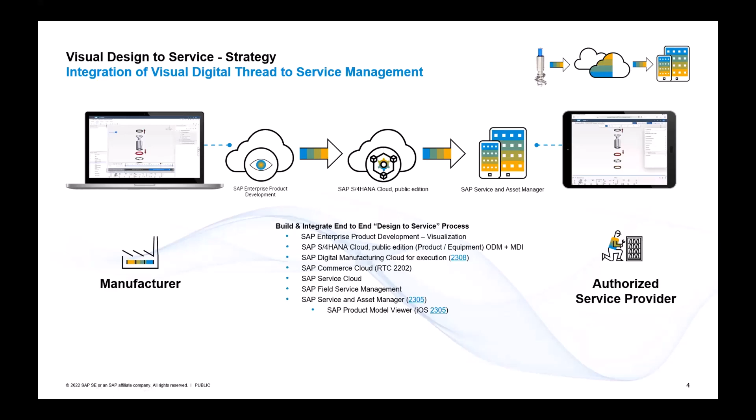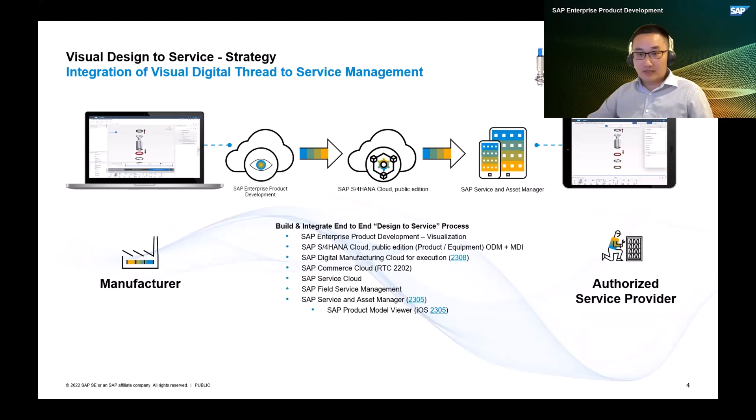And in summary, what we are proposing is a full cloud end-to-end solution. S/4HANA would be the digital core, and obviously, our service solutions in the cloud, as well as the mobile delivery for the execution of service. The input of this process comes from both 2D and 3D of the mechanical CAD software. So likes of Siemens NX, Solid Edge, CATIA, SolidWorks, Creo, and so on.

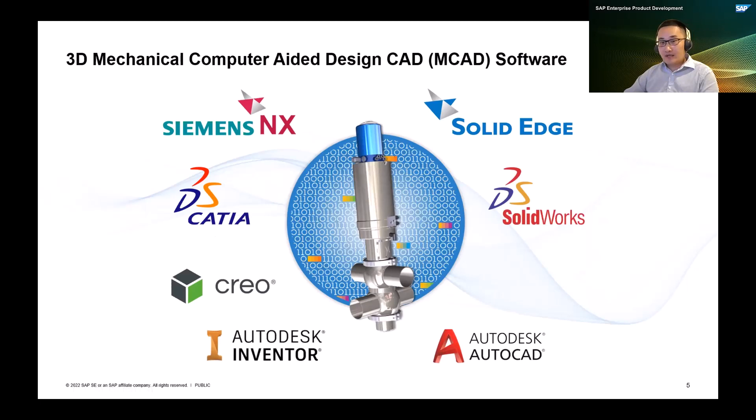And essentially the first question we're being asked was, well, how do we hand over this information? Well, within EPD visualization, we have the ability to basically restructure from engineering BOM to any structure. We do that through a tool called association. And you will see this a little bit further down in the end-to-end process.

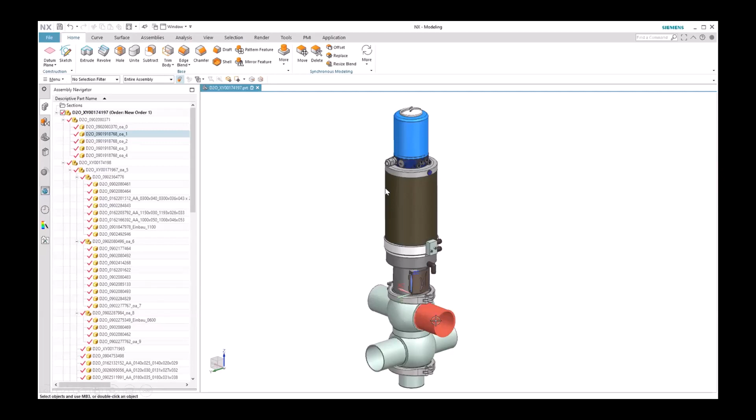All right, so we start with the native CAD files. It could be a visualization, a derivative of that, JT, for example, or 3D XML from CATIA. Doesn't really matter because EPD visualization supports most of the native and the interchange file formats. So we can bring the CAD files into EPD visualization and visualize it.

Within EPD visualization, we have a number of capabilities. The last three capabilities, which will be potentially leveraged by the downstream service solutions, are visual spares and service, visual work instructions, and the product model viewer. I will spend some time to walk you through each of these three capabilities over the next few slides.

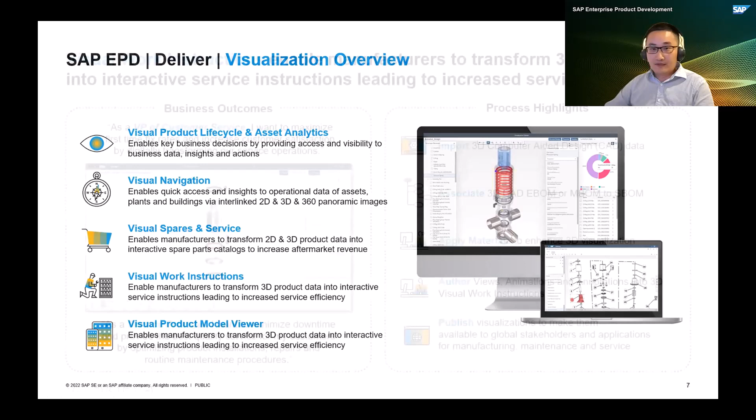Okay, so one of the capabilities is the visual work instructions. Visual work instructions shows how to assemble a product on the shop floor or how to maintain some equipment installed in the field. It enables the manufacturer or service provider to transform the 3D product data into the interactive service instruction, which ultimately increases the service or production efficiency.

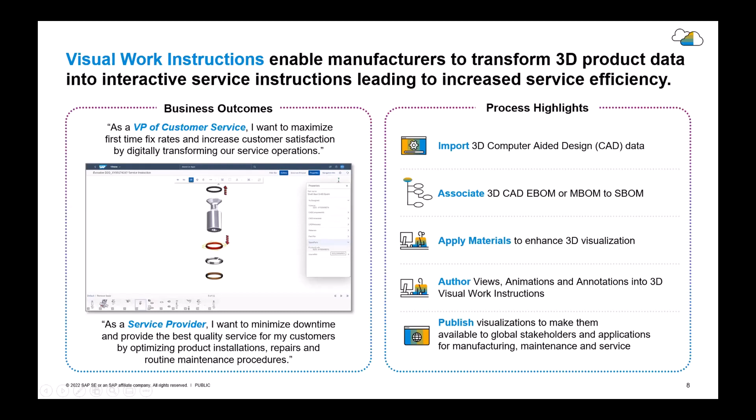Imagine if the service technicians are sent to the field to fix something. They can leverage this visual work instruction to see exactly what needs to be done, which will increase the productivity, accuracy, and ultimately the customer will be happy. And visual work instruction can also be used for manufacturing, asset management, or even logistics to show how the product is disassembled and reassembled on site. Okay, I will talk about the process in the next slide.

Okay, so basically this is the end-to-end process of creating a visual work instruction. User starts with importing a 3D CAD file, then using association to create a new visualization structure and connecting the visual object with the backend business data.

Then use the visual authoring to apply different material or create animation or annotation into the visual work instructions. Then user can also create a viewer template within EPD visualization for a specific persona or use case. The last step is to publish the visualization.

And I just want to also highlight that we actually have a planned innovation in our roadmap that we will support change management for authored visual content, meaning that the user will have the ability to update the visual work instruction if there's any change to the original CAD design.

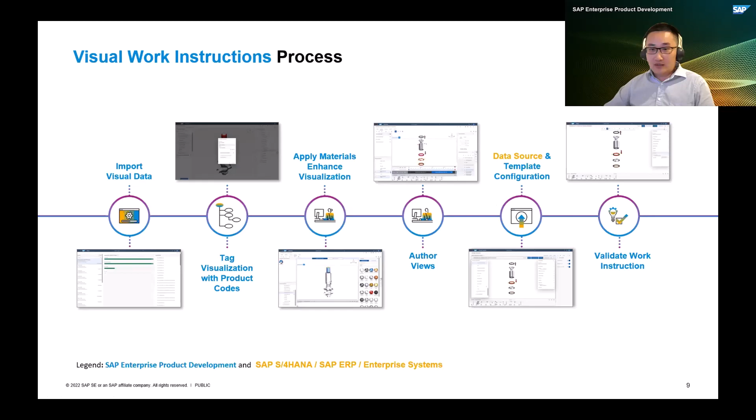And this is just showing you the visual work instructions that we've created for EvoVolve. As you see here, we have tagged each one of those nodes with appropriate global unique identifier. It could be a material ID, or could be a functional location or equipment ID, doesn't matter. Basically, we can assign any type of usage ID to the visualization, which makes the visualization a business context where user can retrieve information for any node or object from any system.

In this case, we have tagged this visualization with product code for Commerce Cloud, but also as designed, which has the material ID here. As I mentioned earlier, our view template is highly configurable, so user can now create a custom 3D user interface by persona. So basically, this view and look can be changed accordingly by the customers.

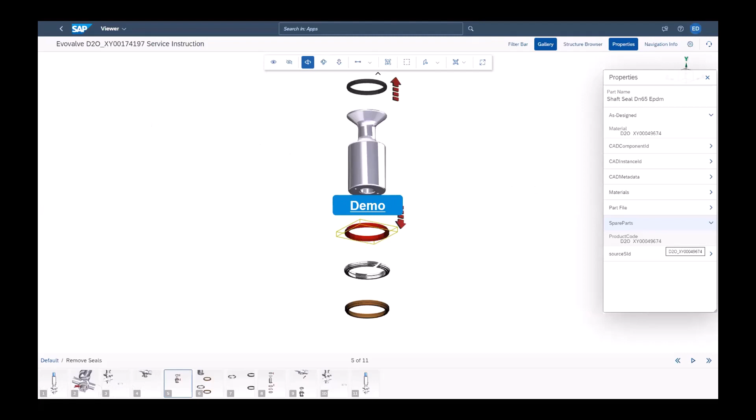Now, let me quickly show you how this visual work instruction we created in our demo system. Okay, as the visualization is loaded in the viewport, there's a toolbar on the top that allows user to perform some basic actions. If user wants to search for a particular node of this model, for instance, the shaft seal in my slide is worn out. How does it look like? Where is it located? You can use this filter bar to search either by name or metadata or usage ID.

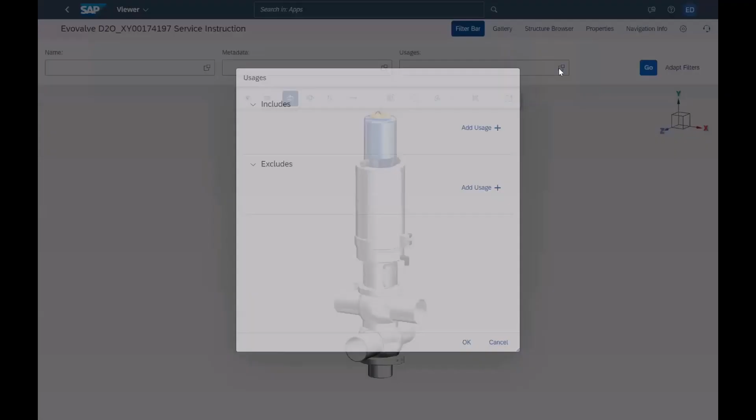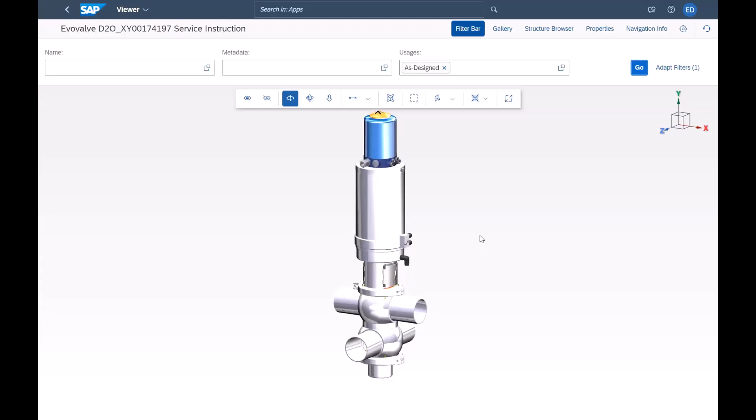Okay. In this case, I will use the usage ID because I know that the visualization has been tagged with as designed, as I showed you. And I will use partial product code, or material ID I should say, for that shaft seal in this case. So you can sort of see where that shaft seal is located, but to make it more visible, you can use right-click and click isolate. Basically, this will isolate all the other components, just showing you the selected parts that you want.

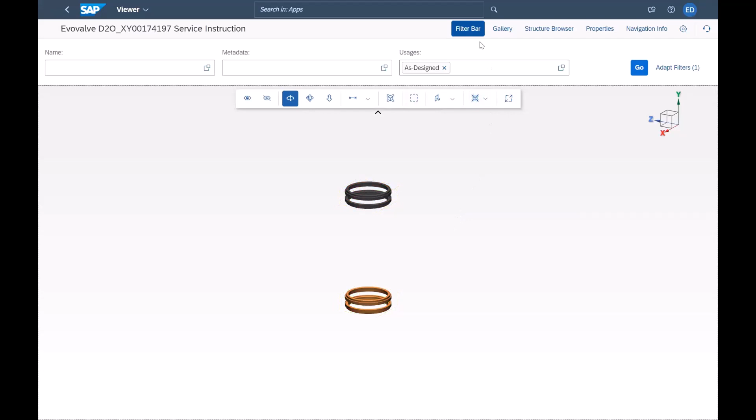And to play the animation, simply click Gallery tab. You can either play the selected view of the animation, or you can play the entire 3D visual service instruction. In this case, I will do that. And in addition, you can merge the visualization into this model. The arrow you just saw is an example.

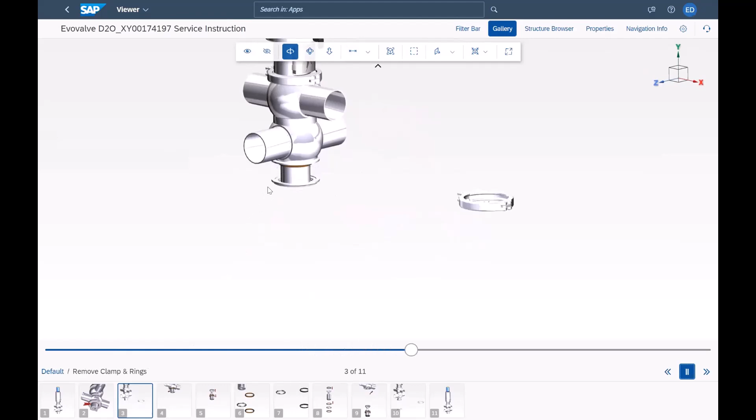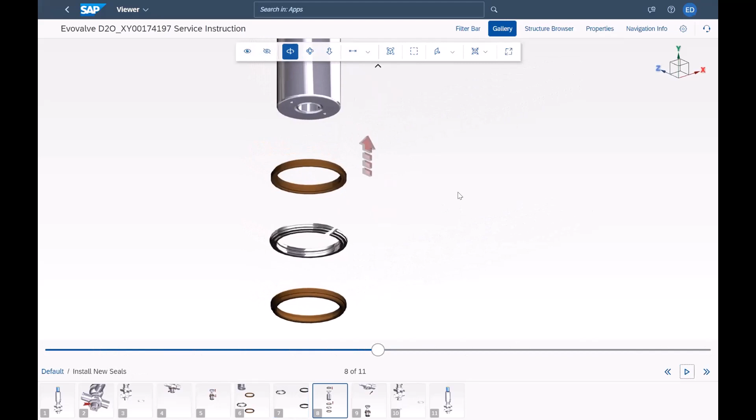So for instance, whoever created this visual work instruction can also add some health and safety symbols to enrich the animation content, all right? So this visual work instruction basically shows how the Evovalve is disassembled, and once the technician replaced the shaft seal, how it's reassembled back. The user can also add some annotation onto the work instruction to help the service technician to understand more information on how to assemble this part.

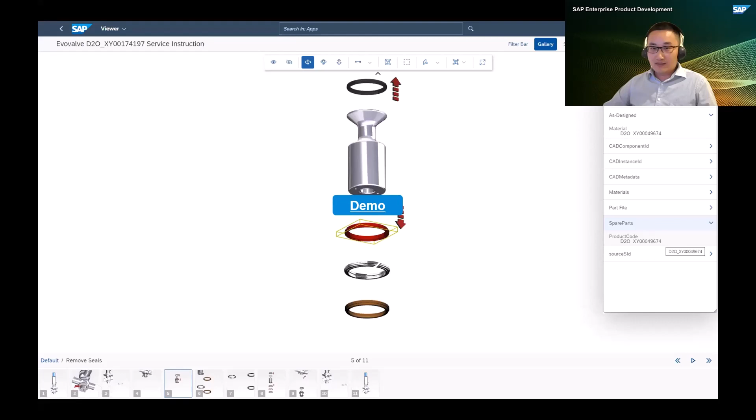And now let me switch back to my slide. Here you actually notice that I have made a selection on this model. So I selected the shaft seal because in this case, the Evovalve has been leaking because the seal is worn out, as I said. Now, what if we wanted to replace the seal with a new one? How do we quickly identify and order this component from the spare parts catalog? And now this brings us to the next use case here, visual spares and service.

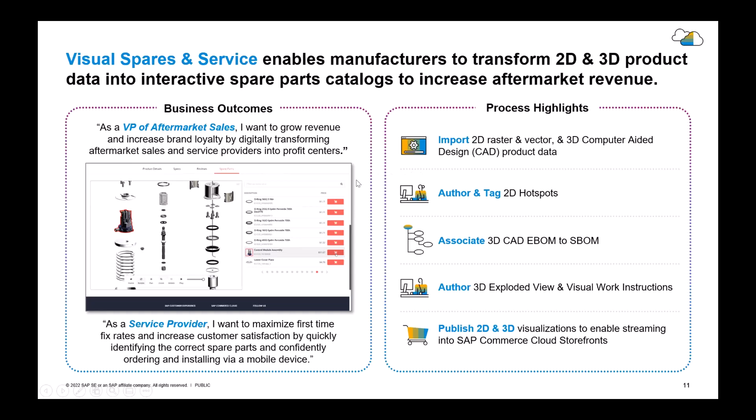Visual spares and service is an end-to-end process from design all the way to commerce. It enables the OEM manufacturer using visualization and integrate it into SAP Commerce Cloud to go after their B2B customers or authorized service provider. So how does the actual process look like? Well, the first few steps are very similar to the process of creating visual work instructions.

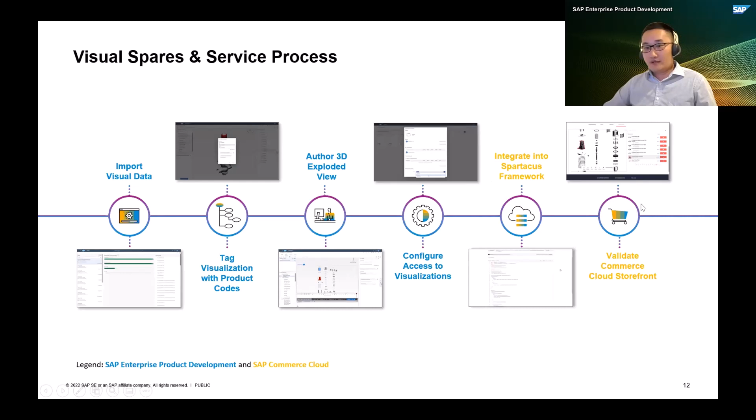The difference here is once the user finishes the authoring, then they make the visualization accessible to the Commerce Cloud storefront by publishing the visualization to a folder that is enabled for Commerce Cloud storefront access. And moving to the Commerce Cloud side, customer will use Spartacus to develop their web store for the spare parts purchasing and configure the Spartacus storefront for EPD visualization.

This is showing an example of streaming visualization into the viewport so the user can make selection for the spare part they need. I will show you how this visual spare part selection works in our SAP Commerce Cloud.

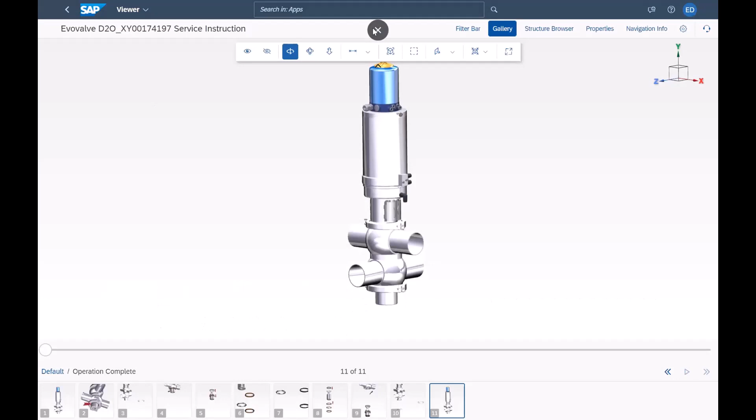So here I'm in EPD visualization. You see this 3D Evovalve. It has been tagged with a usage ID, in this case the Commerce Cloud usage ID that I've shown in the previous slide.

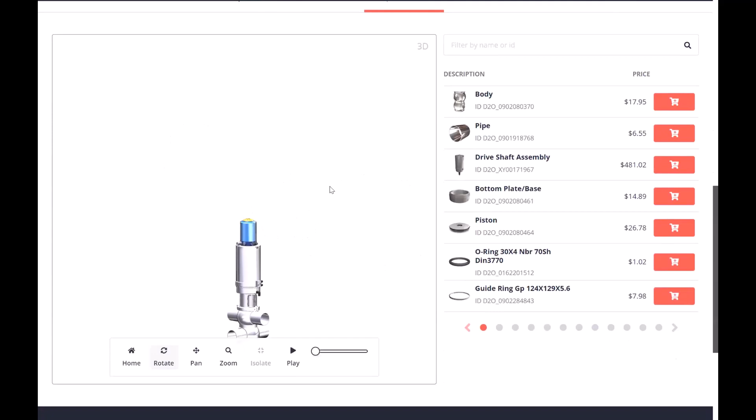If I scroll down in the spare parts tab, I'm now streaming the visualization into the viewport directly from EPD. I can do the rotation, I can do some other activity, I can play the exploded view of this Evovalve.

Again, all the authoring and preparation work is done in EPD visualization. So if the service technician wants to check this pressure spring, as soon as he selects this part, it will also highlight in the SBOM on the right.

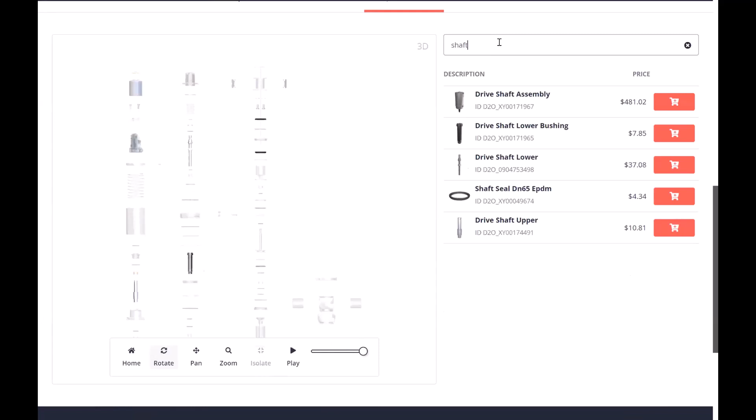The user can also use the filter bar to search for the spare part they need. I'll again use the shaft seal as an example. So you see that as soon as I type shaft seal, it minimizes the options for the spare part selection, and here I can see where the shaft seal is located and how it looks.

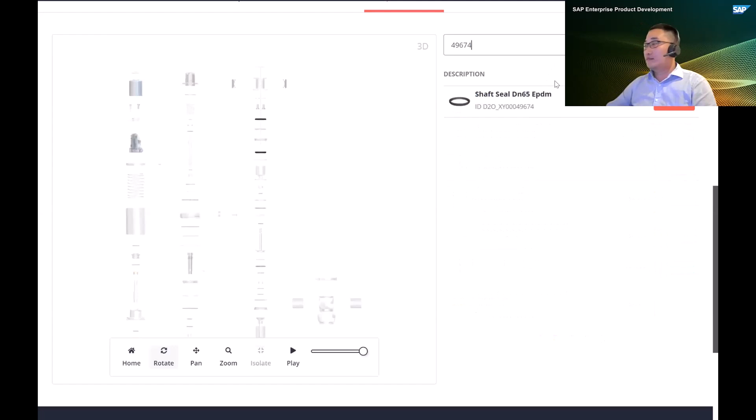I can also use the partial product code to search for this spare part. Once I select this spare part, I simply add it to the cart, like all online shopping experiences, and that finishes the spare part purchasing.

Let me jump back to the slides. Last but not least, Product Model Viewer, a mobile application with its first version releasing in November. It displays 3D models from EPD visualization and allows engineers, shop floor workers, or service technicians to view step-by-step 3D visual service instructions created in EPD. In addition, users can select parts and view relevant product or equipment information.

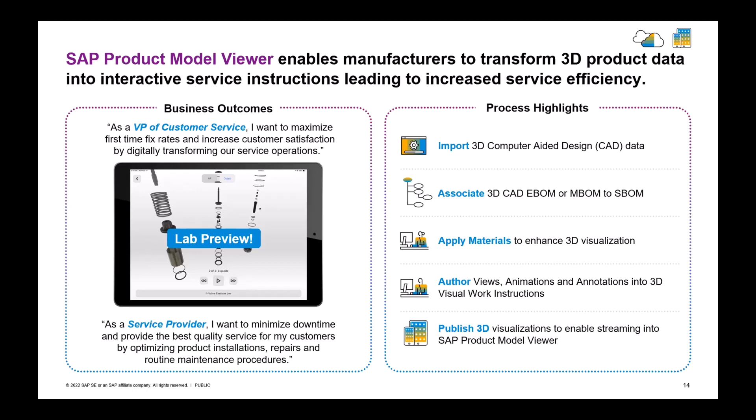Next year the team will work on integration with the SAP Service and Asset Manager, also a mobile application, which enables the user to navigate from Service and Asset Manager to Product Model Viewer, where they can create a maintenance notification as an example, or check relevant business data.

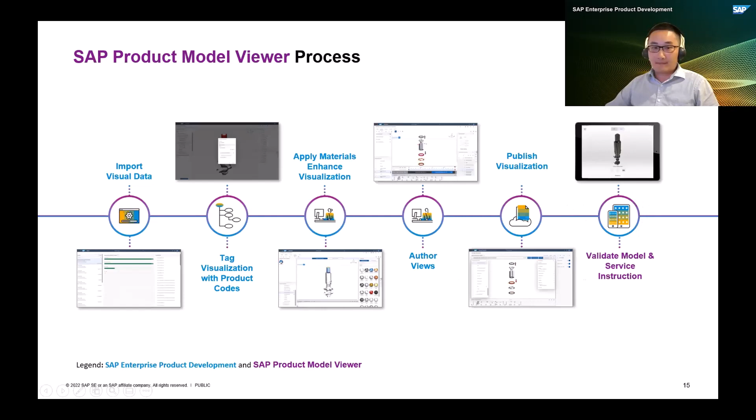Process-wise, it's very similar to the previous two use cases I've talked about. Once the visualization is prepared in EPD, the user can stream it directly into the Product Model Viewer application. This shows that the user can either select object rendering mode or AR mode, as you see on the slide.

Not only can they interact with large 3D models, but users can also view the animated step-by-step visual service instruction, as I said earlier.

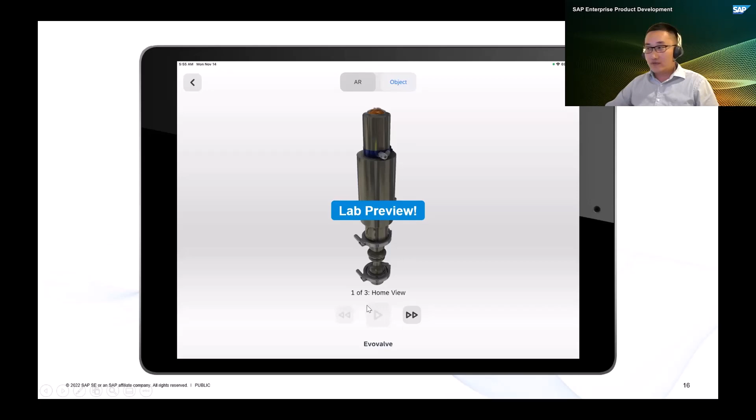This shows the user can select a part or assembly to view the CAD or enterprise information, which is synchronized with the master data in the backend. So this application really allows the user to access business data anywhere and anytime.

Now you may be wondering what this process might look like from an end user perspective. Let me quickly show you this over the next few slides. Again, these are just mock-ups. It doesn't represent the actual user experience that may get implemented by development if the integration moves forward.

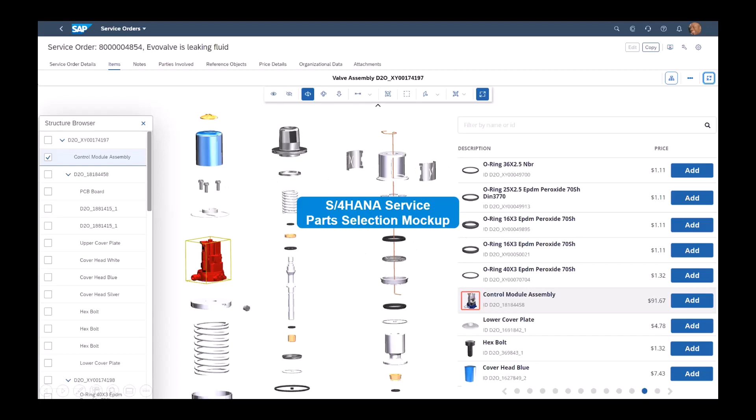By clicking the Add button, they use those selected spare parts, and that gets added into the service order, which is also reflected here. By now, the service order is ready to be released.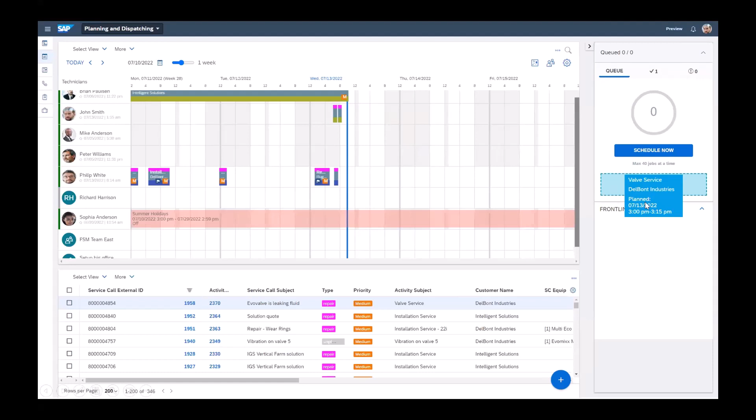Once it gets released, it will take the service order to a scheduling application, as you see on the screen. In this case, this is SAP Field Service Management. The service planner will now select this service order and drag and drop it into this intelligent scheduling window, which will look for a technician that has the availability and meets the requirements specified in the service order, and place that service order into the schedule.

When the service gets scheduled, the service technician will receive a prompt message in their Service and Asset Manager application saying there is a new activity or new service job. Again, the visualization attached to the service order is also available in this application.

The service technician can see all the relevant details of the scheduled work in this application, including customer information, spare parts required, warranty information, requested starting and completion date, and so on.

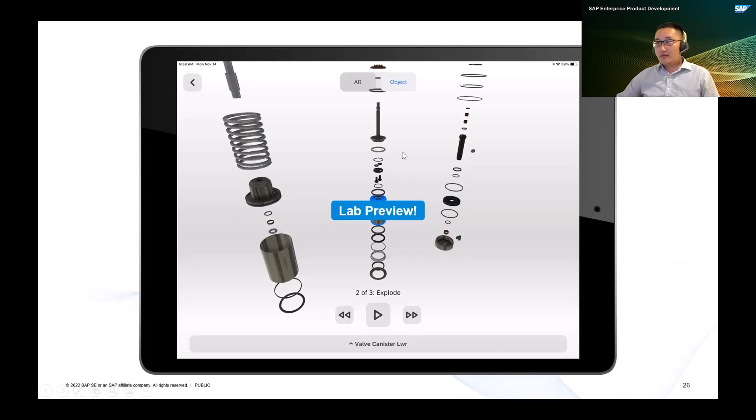As I mentioned earlier, we will have integration between a product model viewer and the Service and Asset Manager in the future. So when the service technician is carrying out their work on site, they can leverage visual service instructions and/or augmented reality to help them complete the work more efficiently.

In the future, we are also going to have dynamic forms in the Service and Asset Manager. Essentially, we will have the ability out of the box to create 2D service instructions, and more importantly, the ability to validate each step in the process.

So the service technician clicks yes or no after a step is completed and signs off when the job is done. As an OEM manufacturer, this ensures your authorized service provider is exactly following the standard service procedure and signing off during the execution phase.

In addition to supporting 2D service instructions, we also think there is huge value in augmenting 3D visual service instructions, meaning displaying information through the camera on top of the actual physical device, showing the service technician exactly what they need to do in an augmented way.

We are still exploring different options at this stage, and we will share more updates on our roadmap in the future. With that, that concludes my presentation today. I would like to thank everyone for your time, and I now hand it back over to Ismail.